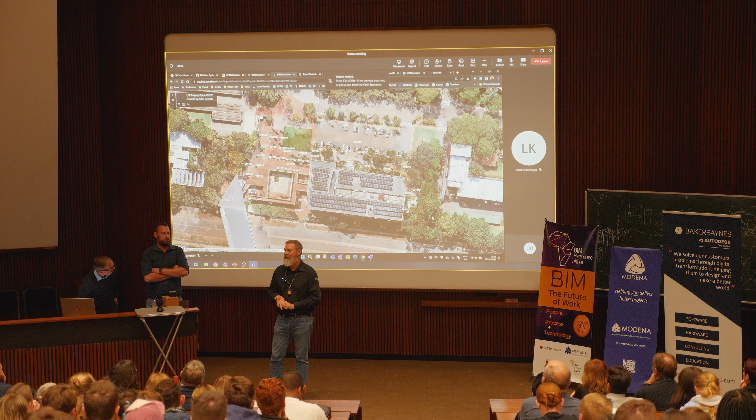Number one, you need to get relevant information that's going to actually be input into your design and planning process. Without context, you're shooting blind. But context can't be drifting in midair. It needs to be anchored down into a proper coordinate system. So the surveying partners explained about absolute accuracy and finding things in the 3D world that we work in. Then we said, because we work in an existing environment of built assets, we need to capture that, and to do that graphically makes a lot of sense. So we're going to show you, and Louis is going to take you through what that looks like and how we went about it.

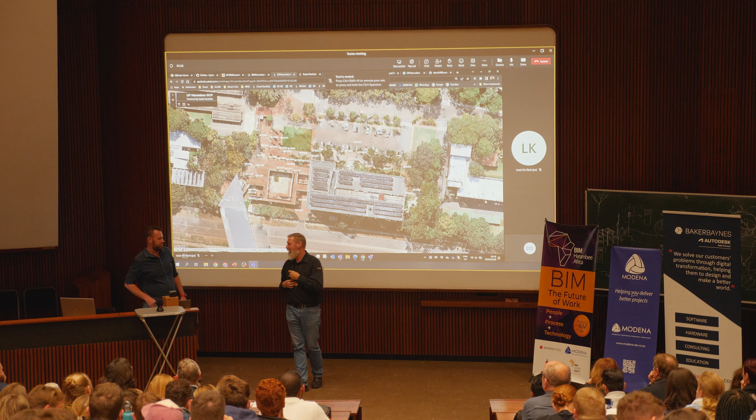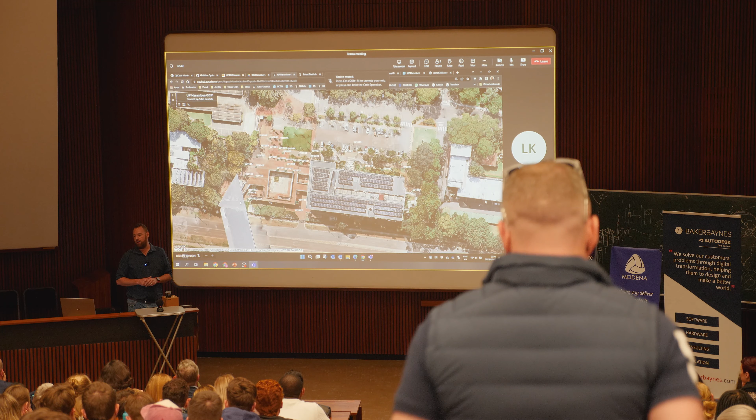And those of you that were here yesterday will remember that when the surveyors spoke, we talked about coordination. And basically any project where you start, that's the important part. If you get that wrong, everything else is going to be off, everything is going to be in the wrong place. So you really want to start with that. And for Boukunde, that's what we did. So, keeping up with the story, we said, let's digitize Boukunde, let's take it through the process. But obviously, it's an existing building, one of the 100 billion buildings. So we want to not build a new one, and we want to use this one.

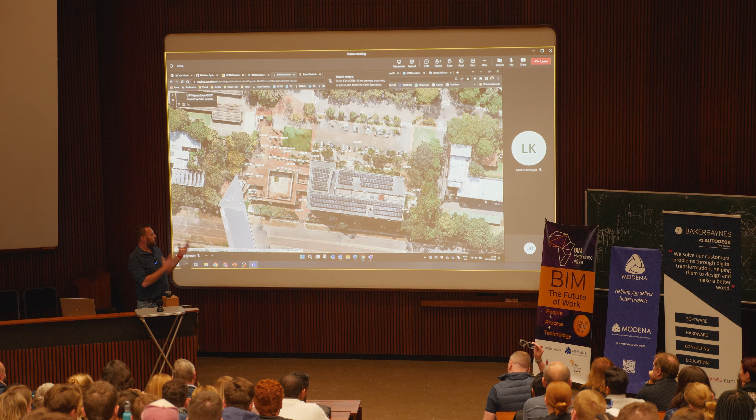So the first thing we did is set up control and set it out all across the property so that we've got accurate information, and we can base all of our other information off this. That's what you would normally find the moment you go to... sorry if there's a bit of a delay, we're running this over Teams. That's what you'll normally find when you start on Google Earth or OpenStreetMap, one of these platforms. You'll get some information and a bit of context of where the building is, but you might not have accurate information.

So we added to that firstly some drone imagery, just to get a more recent feel of what is there, and you'll see solar panels were added. So if we're adding 2 more stories, all of a sudden we've got to consider that, we've got to strip that down first. We've got load shedding, we've got all of these things. How will that impact while we're actually busy with this building?

And then we can start to look at it in a 3D environment as well. What does it look like? Hopefully everything refreshes at some point here. What does the facade look like? So we get that context of what's happening, and we actually start to understand what is sitting at different levels. This we do using drones.

We explained that yesterday, photogrammetry, so taking a few hundred photos of a building like this in a structured way gives us the results we need. That information gets coordinated with the control that was set out so that we can get this thing accurate in the right place. The next step we go through is using the laser scanners.

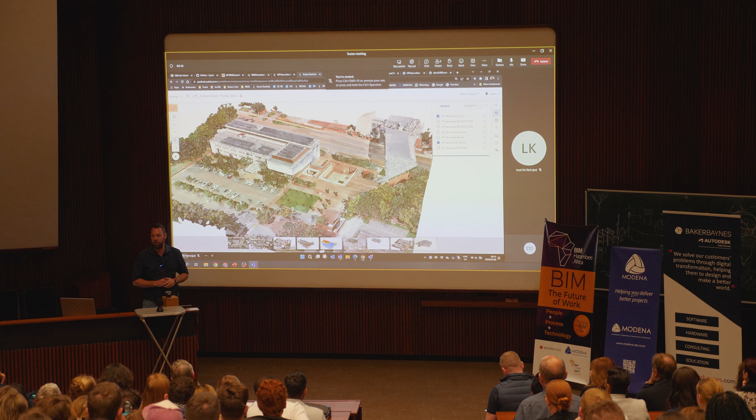So we scanned the Boukunde building. We quickly pushed 2 scanners into the building, and with the handheld LiDAR scanners, the SLAM scanners, we were able to scan this entire facility in an hour and a half. Again, using control marks set out on the outside, we coordinated all of that scan data and registered it together. This one might take a bit more time to load.

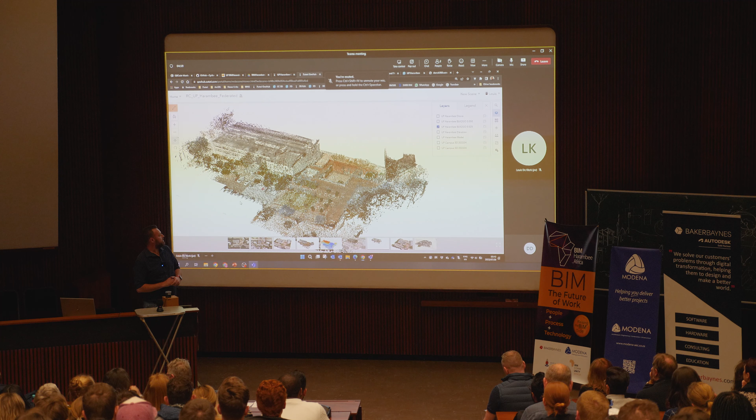So there, anybody that hasn't seen a point cloud, it's millions of points, and especially zoomed out it looks very rough. But if we get a bit closer we start to see, and hopefully with internet connections it will crisp up a bit, and you'll start to see more information about what's there. And we get that inside and outside.

We also scanned the outside here, so I just want to quickly show this - this is a live demo, so you'll see how things work or don't work.

Fortunately, the one thing that's quite interesting that we've made happen here is that everything you're seeing now is running on Esri's platform. It's live, it's in the cloud, as we like to call it. So it's no special software, making it available to our clients, to whoever needs to work with this information or view it accessible. They don't need a supercomputer, they just need a stable internet connection.

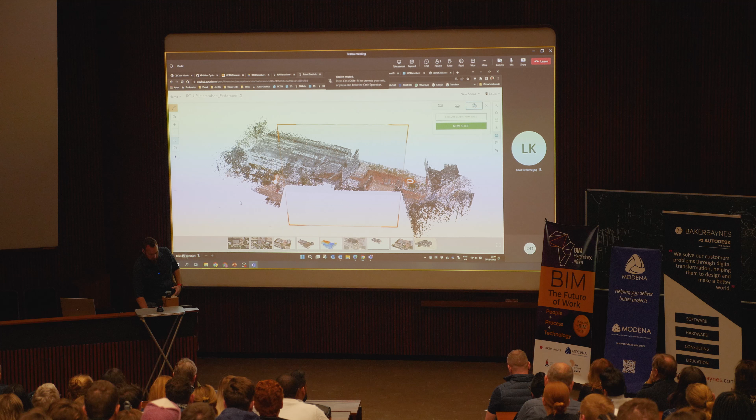So from there we can start to look, and it will refresh now, so I'm going to leave it here. We can start to look into the hall where we're sitting now, and we can see the chairs, we can see the roof, we can see the screens, we can see all of that information. Capturing that information accurately is the big win here.

There's scanners that deliver better point clouds than this, but they take longer to scan. So there's better scanners than this, but then you've got to look at why are you scanning? Do you need accuracy, or do you want the speed, the convenience?

There's certain areas where we've recently been working, where we're scanning hospitals, and going into a ward you don't want to spend 10, 15, 20 minutes in a ward with a scanner that you've got to try and move around all the curtains and things. So having mobile devices that can quickly capture something, that aren't complex to use, is the big win for us.

So yeah, there you can see what that looks like in terms of the scanning, and we can slice and dice through this thing as much as we want.

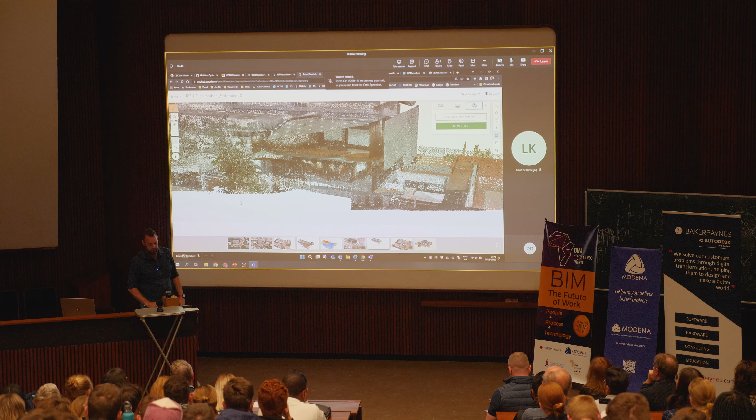And then at some point after you've scanned this - and I'm going to skip a bit of the rest of the process - but eventually you'll get to a point where you'll actually have a model, which you can then put on your original Google Earth layout, and you can see that it sits in the right place if it's coordinated.

And you say, okay, that looks great, that plan is going to work. And with this model, yesterday - can't remember now - somebody talked about the construction side of it.

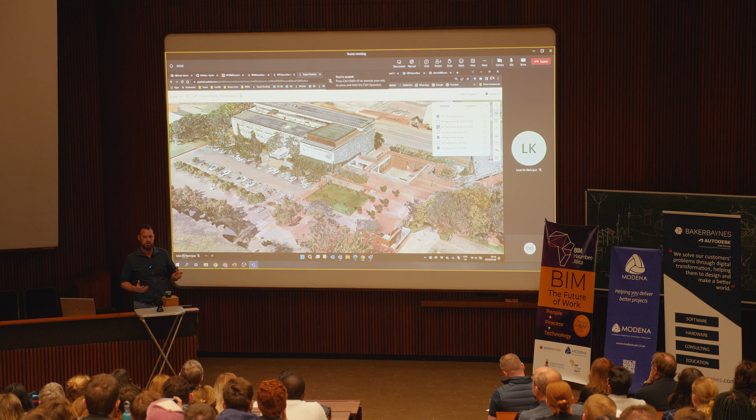So all of a sudden you go into the construction side and you can actually start to overlay information like the drone cloud, and you can see the drone mesh, and you can see, okay, yes, things are in the right place when we're constructing. We can start to bring in the scans if there's scans during the progress of constructing this building.

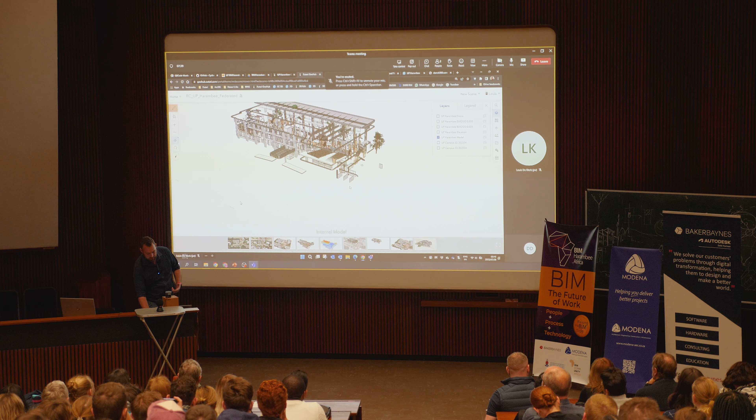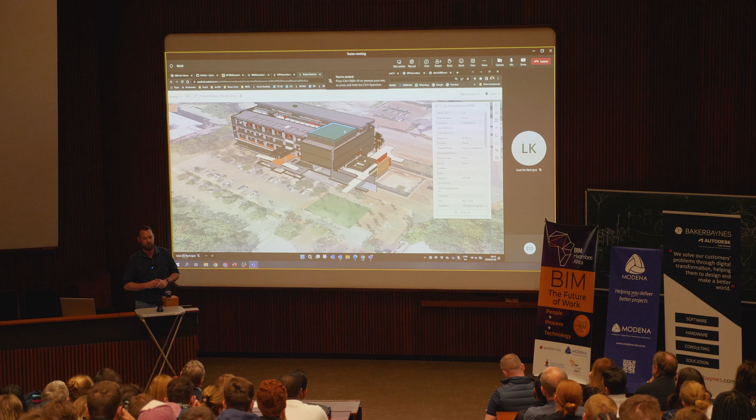So looking at these things, seeing that things are in the right place, tracking that construction progress is quite valuable as well. The important thing, and something that Michiel mentioned as well, is that these components and these models actually have properties, they've got detail. So not just a line or a block, but there's actual information linked to it. And that's where the important part comes in. If that stuff is wrong, then when you share this model with the next person where they need to work with it, it's not going to work. So making sure that all of the information is correct in these models, it's available to the people that want to view it. If the client wants to view it, if he wants to see information about the light fittings we're going to install or whatever we're going to do, the information is there.

Yeah, and we were able to federate all of this information and view it all in one space. So, obviously there's a lot of value in this, and specifically buildings. And then we can actually eventually take this to, let's say campus level or city level, and that's where we would want to go eventually.

So one of the challenges that we a lot of times experience, especially with some of my colleagues that's not so much building focused, but more on the rest of the disciplines, is that the moment we say the word BIM, so building, they go into, oh, it's not applicable to me, it's not relevant to me, I don't deal with buildings, I just design roads, or I design bridges or something else, but it's not a building, so I'm not interested anymore. And for me, that's not really where we want to go.

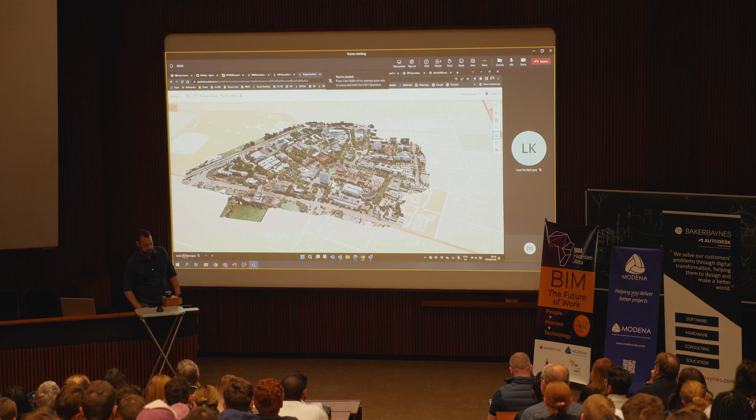So if you look at something like this, this is a road section, it's part of the N2 Wild Coast Road, the new N2 that's going to be built leading up to the Msikaba Bridge. Some of you might have seen some stuff in the news that's got massive pillars. It's quite impressive, go Google that bridge.

This was just post-COVID, and we had to figure out how do we do this? How do we now share information with contractors where they can't travel? So when I say post-COVID, just past level 5. They can't travel, there's no places to stay here, there's lodges like an hour's drive from there that's got maybe 3 or 4 rooms, so it's really a challenge.

So myself and Richard sat together and we figured it out, and we said, okay, we're going to build a virtual site tour, or a virtual site visit for all of the contractors that now needs to bid on this multi-billion rand project. So again, like I said yesterday, flying cameras is what we're about to get information, so drone wasn't going to cut it here, so we got a plane, hired a plane, got somebody else to fly it, we didn't. And so we fly drones with those pilots.

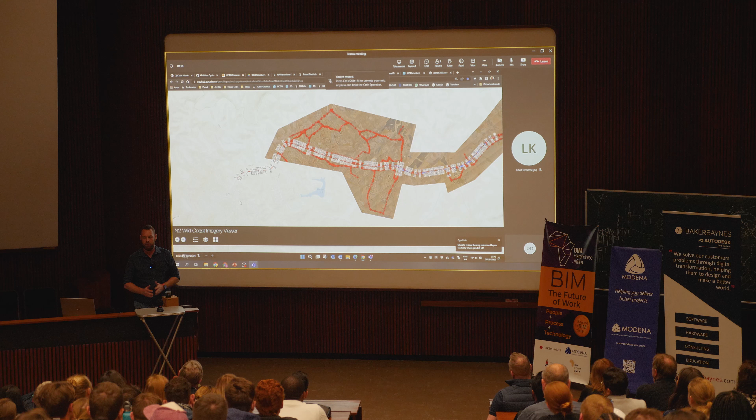So then we got them to fly this area for us, and we then had some great imagery, and that's all cool, but we also had a design. And what is great about this design is that it's not a model, but it's got the same kind of information.

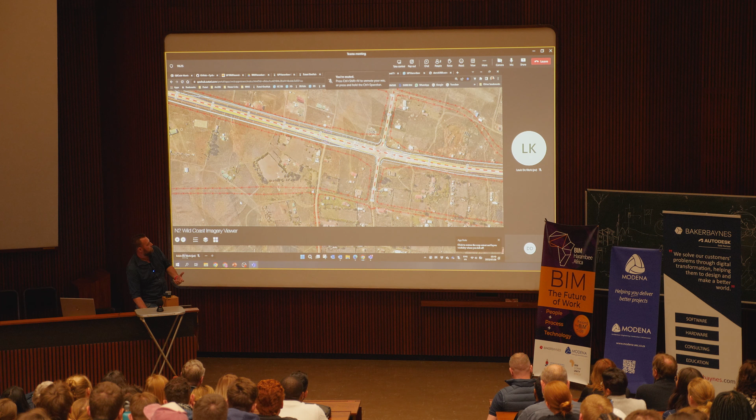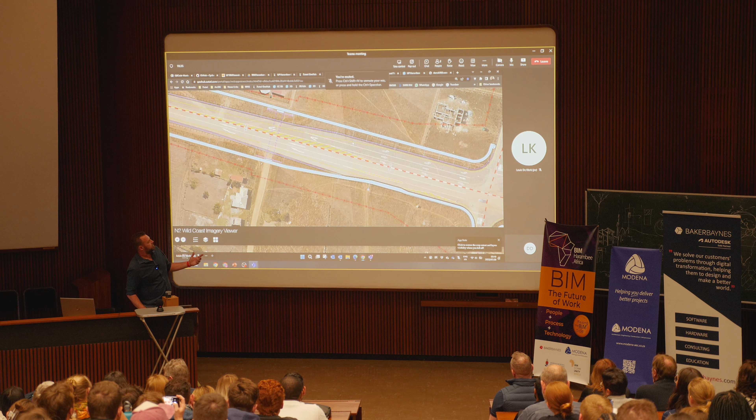So if we zoom into this and we start looking at it, the contractor can click on a line, if it will click now. And it's also got properties, which is not loading for some reason. You must know when you want to show somebody something, then nothing works. Yeah, now it is not loading. So we're going to have to refresh this thing. Sorry, it's hibernating computers and stuff.

So these things also have properties. If you click on the lines normally, they'll tell you it is a 150 mil yellow line, or it'll tell you what the white line is, or that it's a drainage structure, or whatever the information there is. So having that information on a model like this makes it available to the contractors, available to people to see what is going on here.

We can, at the same time, the spin-off, the benefit of this specific thing was as well, that when you start to deal with the community, they can also see how this project affects their property. Because again, like Michiel said, printing out a roll of drawings, it's very difficult to communicate that. If you don't understand a roll of drawings, you don't understand what you're looking at, you don't understand your property's boundaries, how is it affecting your house, how is it affecting your entrance, all of those kind of things. So yeah, you can see there's some properties about that line, which makes it easier for people to understand.

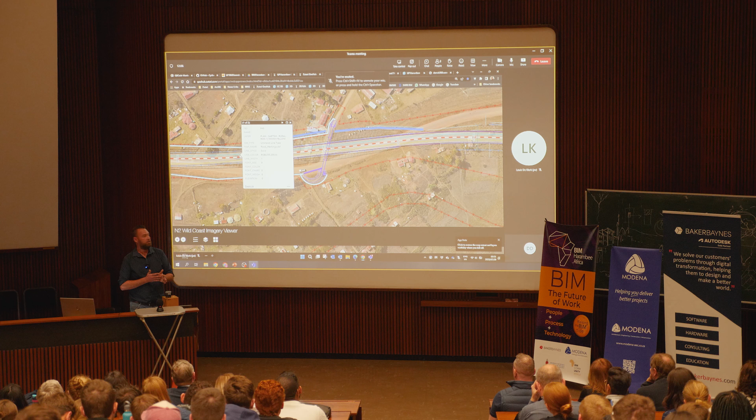We can see where the alignment is changing, where properties are affected, so that guy who owns that house can all of a sudden see what the effect of this is on his life, and how it's going to affect him, making stakeholder engagement a lot easier, because those are real challenges in this world. You try and build anything, and you see how you deal with communities and people who want to understand what they're getting out of it, but also how it's affecting them, especially in environmental areas like this, where there can be quite a big impact.

Do I still have time? Okay, cool.

I'm not going to open every week, because then we'll be here for a long time. But let's start to look at how the construction changes over time. We can compare what was there, what's there now, and track information about this. There's one example, but I don't think I'm going to get that loaded up with all of the internet.

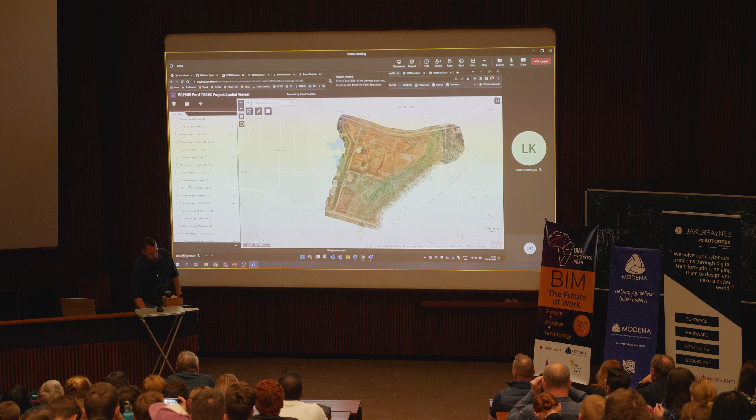Over time we can share this information. The benefit of going visual with this kind of information when you're running a project is you might have clients sitting in different places, like we had here sitting in Japan, in America, and in PE, all involved on the project. All of a sudden we can collect this information at 8 o'clock in the morning, and by 3 o'clock in the afternoon they've got the latest version available to view, to see what the progress is.

When you sit in a site meeting, when you talk about something, when you use things like 3D imagery and run something like OpenSpace, or you've got a scan, or a drone model, that information becomes a visual aid in that meeting. You don't have to take 25 people and try to mosey through the construction to get to a point to see something. You open the imagery and it's part of the record.

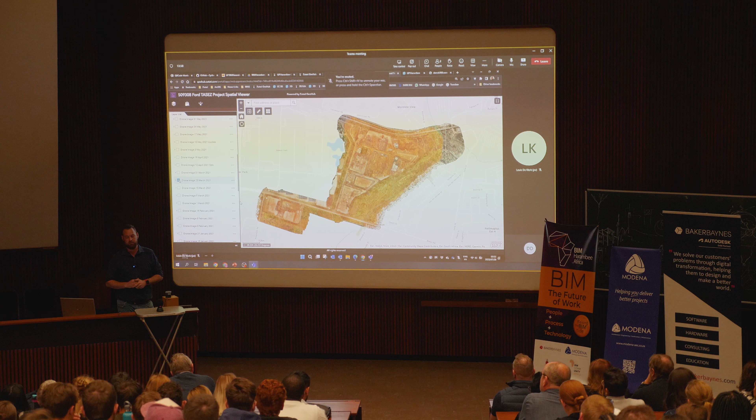We've recently been part of projects where there were disputes between us and contractors about work, and our director said, that's fine, let's leave it there. Jaco from OpenSpace mentioned this yesterday as well. They pulled up the 3D imagery, and the contractors said, it's fine, leave it.

Because they knew. So it becomes valuable in terms of measurement, having a viewer like this, having ballpark measurements as a QS to say, you're getting a payment certificate from somebody, being able to log on to something, measure an area, and say clear and grub, yes, it's there. Demolishment of something, yes, I can visually see it. I can see progress of things being installed, and I can pay you for that. And you can verify that without trying to walk around, or taking stockpile measurements.

There are a lot of places where this kind of information, when you start doing construction work and moving into that phase, is valuable, but you need to understand why you're doing this, what information you're capturing, and how you're capturing it. So it's about planning. This information can get quite a mess if you don't manage it well, like that Dropbox that Richard mentioned. So have a plan for how you're going to store this information, how you're going to transmit it, and what environment you're going to store it in. Because if we start emailing these photos around, who's working on what version? Collecting all of the information in one place is where the value in these kinds of things sits.

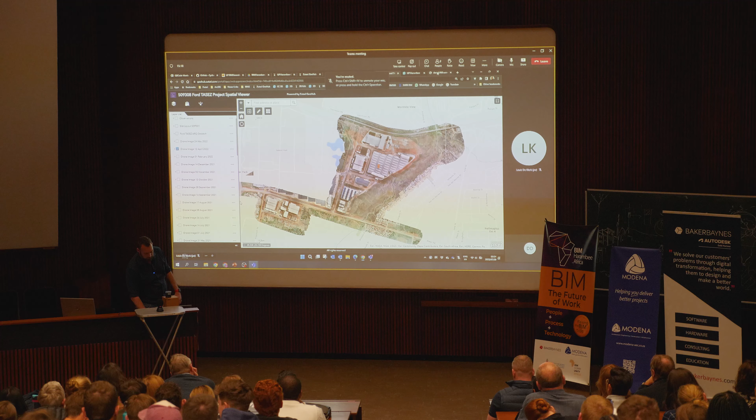I wanted to show you something else, but for some reason Autodesk is not wanting to sign me in. So yeah, but that's basically my story for today.

We're going to flash a QR code onto the screen at some point during this morning, I don't know when. But you can scan that QR code and you'll have a bit of a different version of this viewer that I had on the screen. It unfortunately doesn't have the slicing tool in it, but you can look at the point cloud and navigate through it, look at some of the information, and just see what it looks like for yourself. You can try to find some of the modeling mistakes and the things that are there. There are a few fun finds there. We didn't make it, it was just like that.